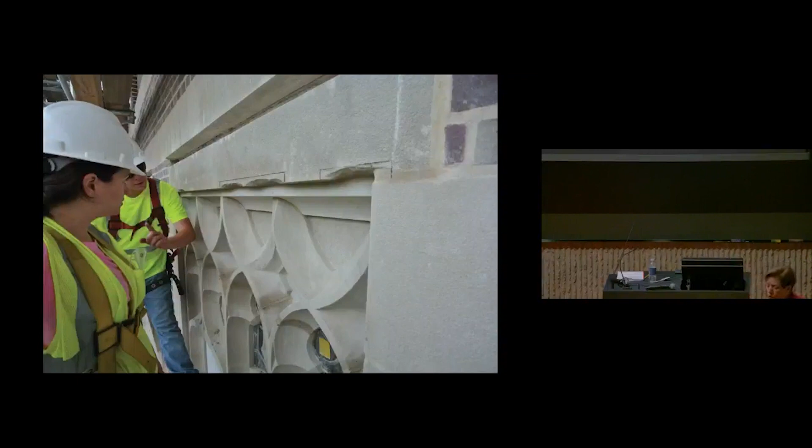The first thing—and I want to talk a little about methodology—was to find out what this deferred maintenance was about. Of course, it's about water, essentially—water, money, and the deterioration of materials. So one aspect of my practice, and now Annum Architects, is to understand the fabric of the building, to get up close and determine how to care for it. The stewardship aspect is central to the work.

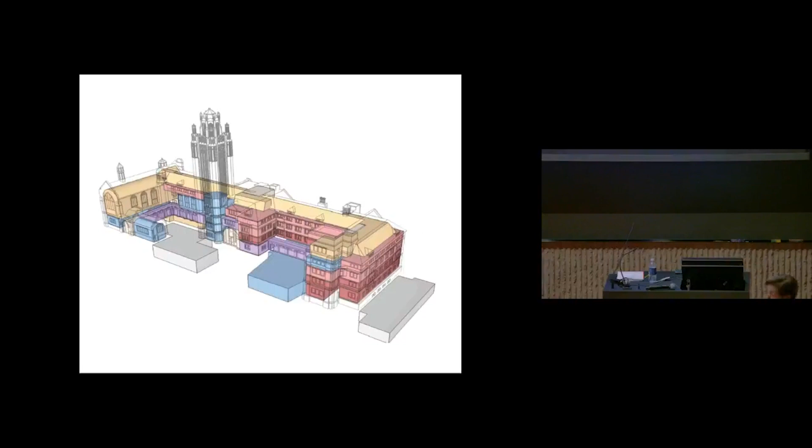The second step is to figure out its place in the city. This building's place was such that a truck dock could drive through it—it was the remainder of a street. The question of unification and identity came together as we started to look at how to program it, how to get offices, collaborative spaces, economics classrooms, and plain people spaces into a building that had never been built for those purposes.

You'll see in the blocks of blue and gray something that's coming up. Coming back to the fabric of the building, it was also about the heritage of what they did versus the heritage or instinct and need that the university had.

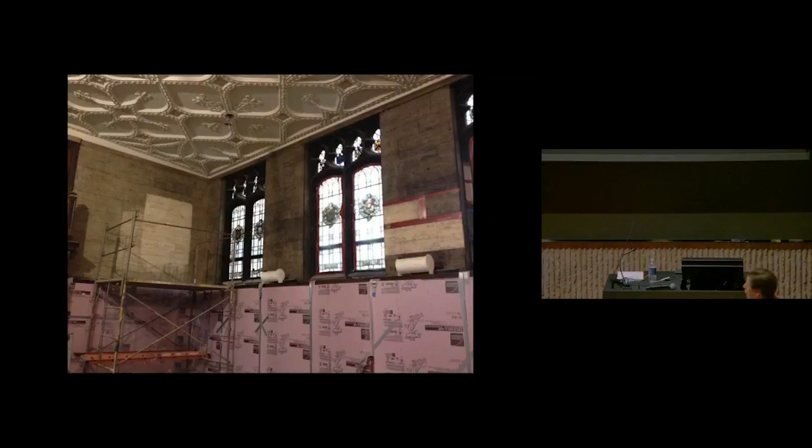We started by cleaning and, if you will, unveiling the quality of this building. We kept bringing students and faculty through it so they could get used to the idea that they were not going to be teaching in a church—they were going to be teaching in a building that had a story, and they were going to make the new story.

So cleaning it and repurposing it for vital daily use was part of the work. Those of you who are engineers will see no ductwork, no sprinklers—you see sleepless nights trying to make all that work. The effective way we worked with systems in the historic spaces was to try to conceal and integrate them as much as possible so we could retain the original fabric.

The space that was the chapel is now the Graduate Student Center, set up for parties and events. The integration of new lighting and old lighting doesn't seem to fight with each other—I think they're having a conversation. That's true also in some of the more Harry Potter-esque areas, which were dim and difficult to navigate, where lighting and restoration gave the space an opportunity to welcome people and move them through the building.

There are a lot of, yeah. I can't interrupt you. As lovely as it is to have you so close, YouTube isn't picking up your sound. So if you could go back to the mic, that would be great. Too bad, because you didn't come to New Haven. You saved on gas, you saved on carbon footprint, but you missed us. As my family will tell you, I'm available for lecturing anytime.

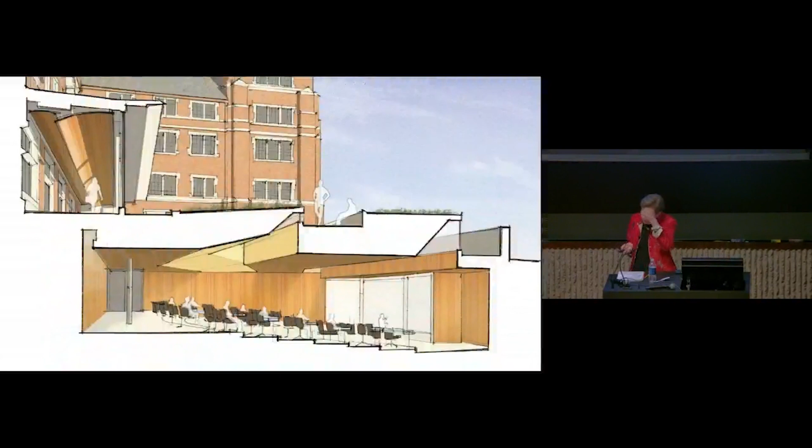And then finally, the other intervention is the need for a large lecture hall, which the structure gave no sense of. You could not make such a space and keep this building intact. So we excavated, and we dug down for both mechanical systems, and we used the tightness of the below-grade envelope to develop a greater sustainability about the systems. And we were able to create a well-lit, large lecture room that is used by the department and really by the whole university.

So in the back, there was also an opportunity. I'm always big on: you go where the dumpsters are, go where there's a problem, and then come up with something that really makes it a place for people. So this was the back alley before it was closed, and that's that space now. The street is a shared street. The opening is closed, the buildings are united.

And then this pavilion building, which is 4 stories, is for economics research and collaborative work. You can see that it's full of open spaces with views out, and it has a scale that was intentionally trying to participate in the heritage of the small row houses along that side street, so that it sat comfortably behind them as part of a new and old conversation.

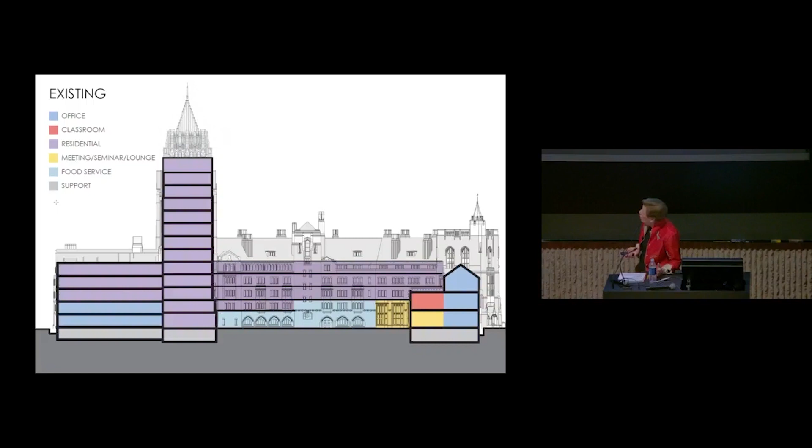So as a space for people and for collaboration, this was the way it was organized. The architects know this purple basically represents one kind of use, and the idea was to change and integrate new uses. So whatever the colors mean, you can see that the hands are intersecting now, and that they're collaborative spaces mixing with offices and mixing with meeting spaces.

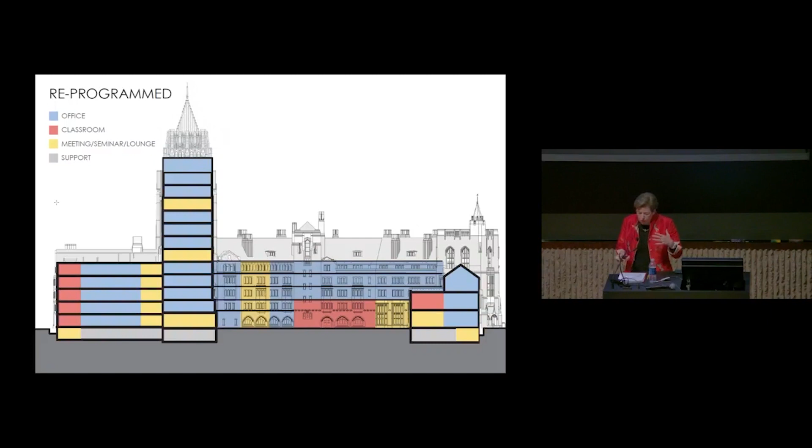I'm doing this because I think Gordon Smith is, as an engineer, focused also on how things get done. These are images of some of the research and repair work. Here are some of the folks doing that work, and the day-to-day activities there, including the restoration, working with craftsmen.

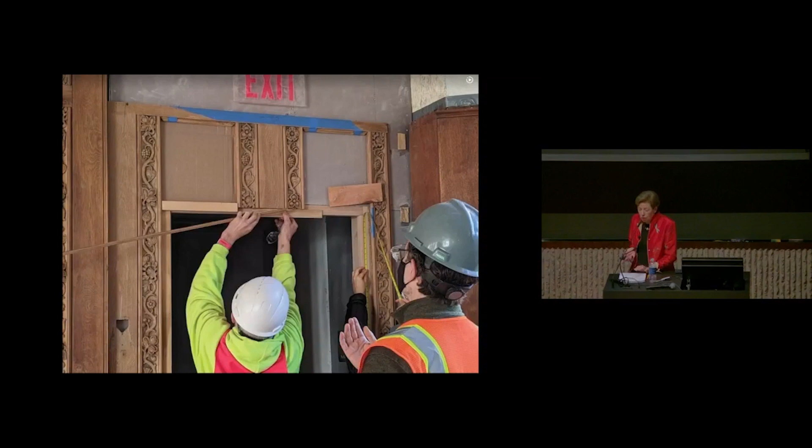Trying to find a lot of craftsmen in the Connecticut area was part of this process. There were literally hundreds of leaded glass windows that had to be restored. There's no one crafts company that can do that.

We had to have 3 different leaded glass groups all throughout the Northeast take on a portion of the job. So now you're seeing the results, which is a kind of rekindling of the spirit of the space and the materials. Much of it changed because it is now completely accessible for ADA purposes. So these levels are raised even though the stone is put back as it was.

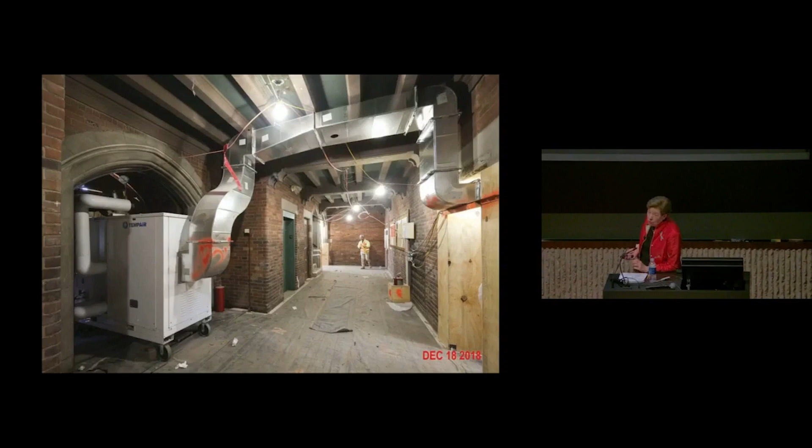And in it also is a new stair, a new vertical connector that unifies the building. And if we were all having a lecture there, we could do that via that stair without disturbing any of the offices. So we did need the stair to go someplace reasonable. This is where it was going.

And now that space is a student concourse. It's below grade, but it includes open spaces, lots of borrowed light, and a kind of light touch for doing whatever you need to do.

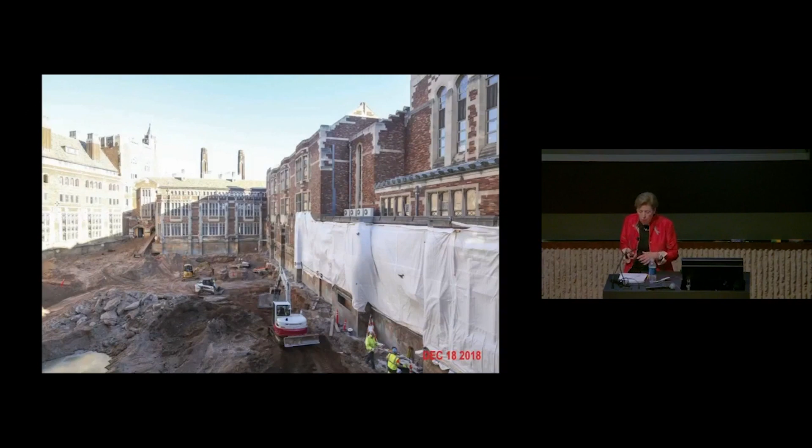And then finally here also, the goal was a lecture hall and the goal was a film center. So there was no way to add footprint to the site. The idea, again, was to find, outside of changing the structure of the building, those opportunities for the broad span functions, and so that's what we did.

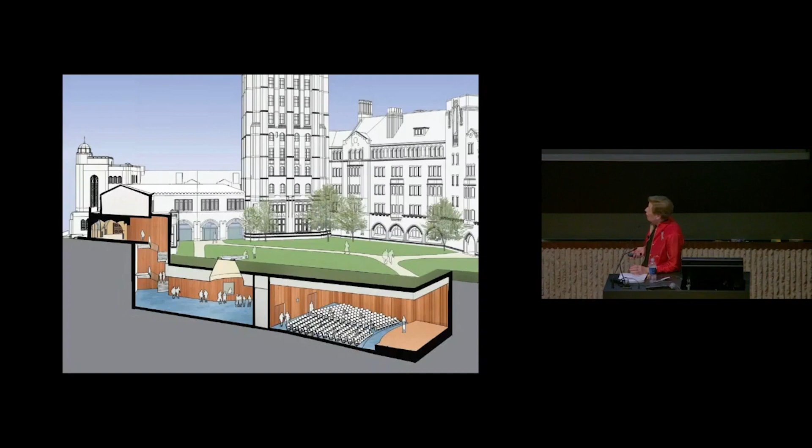And we brought Chicago to Yale, but Yale taught us so much that was different, and it was so complex. And now these spaces are quite different, fresh. I'm thrilled to see people using them back after COVID.

And they have skylights that go out into the garden above, but this is all under essentially a green roof. And that's the lecture hall.

So historic spaces are certainly well cared for in this building, but that contrast with the more contemporary spaces is intentional, and hopefully it's a marriage that's a happy one, where there's a legibility.

I think that buildings teach, and occupying a building like this should be both an opportunity to reference Yale's history and legacy, but also to think about the way we teach now, the way we learn, and the kinds of integration of contemporary design that are possible within historic spaces.

And that's the green roof, the courtyard. So I'm glad, Deborah, thank you for mentioning it, and I hope people will go there. So that's 2 that are similar, and they're both landmarks, and the intention is the integration of new things and the redemption or redevelopment or reassertion of things from legacy period.

It takes a huge team, and I can't go forward in talking about 2 more projects without saying that although I give the lecture, it's a great team of people, including Yale Facilities, who make it happen, and they deserve tremendous credit.

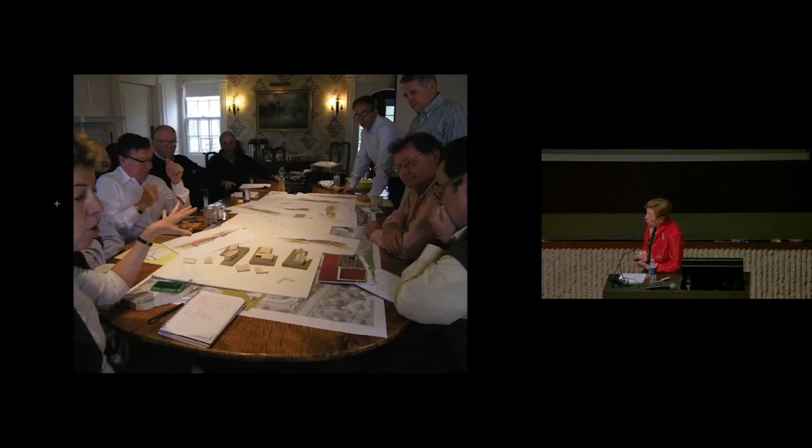Let's go see the real McCoy from the 19th century. Let's see the collections in situ, the way the donor planned them. And what I'm going to talk about for both these projects is the client group.

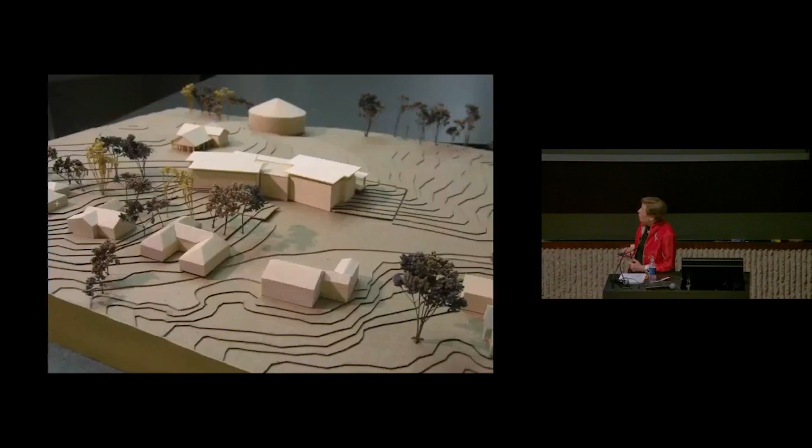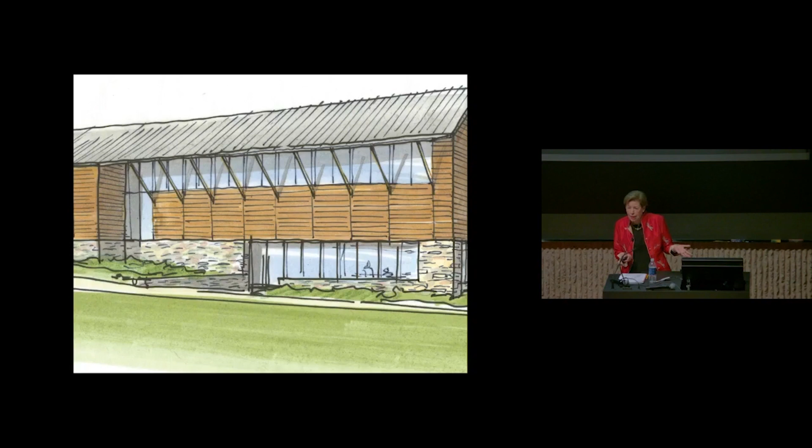So in this case, this is a typical workshop, and as you can see, this client was actively engaged in determining what would happen. There were hands-on sessions again and again, with lots of models and options, and they needed to time travel to understand what they felt and could build consensus about: a piece of 21st century architecture. If you've skipped the 20th, what's the 21st? And when you say you want a contemporary building in an historic setting, what do 12 people really mean when they say that? And what does the community of Shelburne mean when they say that?

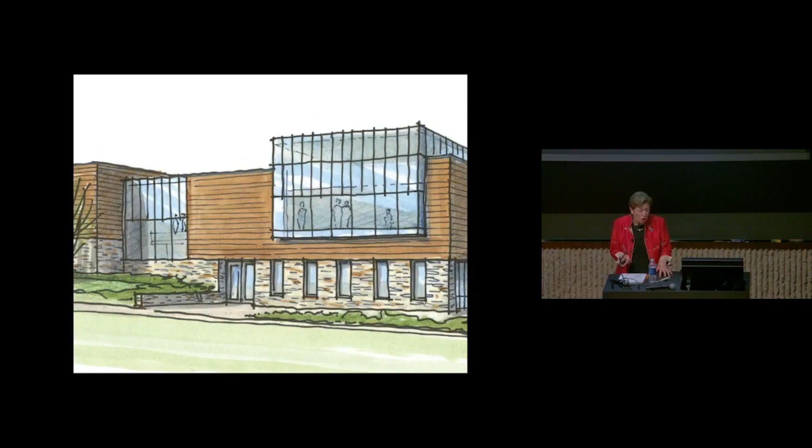So we started to develop what I call the series of options. I spared you 4,000 of them and brought about 5. But we just kept pushing the question of, what about more glass? What about siding? How tall can we be? What about the connector being glass? What about the use of stone? That's common to your area, and we can use Champlain stone. What about cedar? Yes, there's maintenance, but it's from around here. What about a large oculus? Can we look out? How do we feel about a flat roof? When can we start to think about a porch?

And the narrative of how you make a building, for me, is one of interface and interpersonal connections on a professional basis where each side is pushing each other forward. And the outcome has to be something the architect believes in, but the client has to feel passionately enthusiastic about.

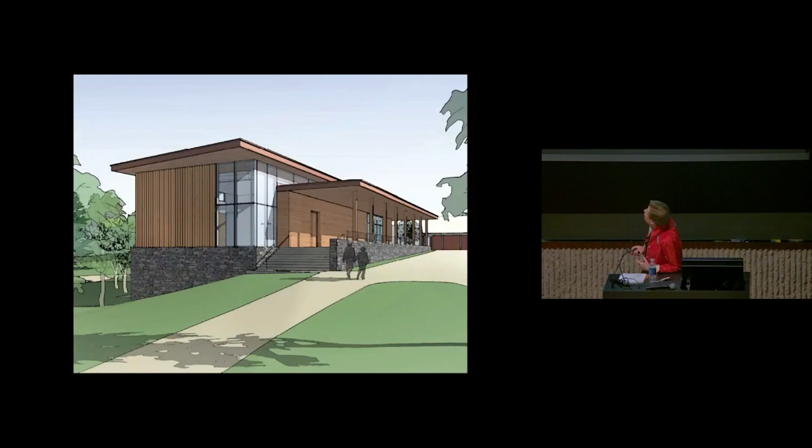So we did finally get there, and I'm just showing you how we got there, and that is largely through the use of common area materials: beech flooring, cedar siding, stone referring to the stone already on the site, setting up mock-ups, letting everybody see it. There were a lot of snowy trips.

And this is the building now, and it sits as the gateway building to the entire campus. It is, as I said, made of very simple materials, a very resilient curtain wall because of the climate extremes in that part of Vermont, rubble stone from local sources, and then wood siding and very simple detailing. And it has tall spaces inside, with Vermont slate flooring.

And a large meeting room that's used for everything from craft fairs to weddings, with views out onto the site. And then again, this idea that transportation between the two floors should feel like a flow that's engaged with views as well as engaged with simple materials. And always the view — that's the Ticonderoga, a riverboat to die for that crossed Lake Champlain.

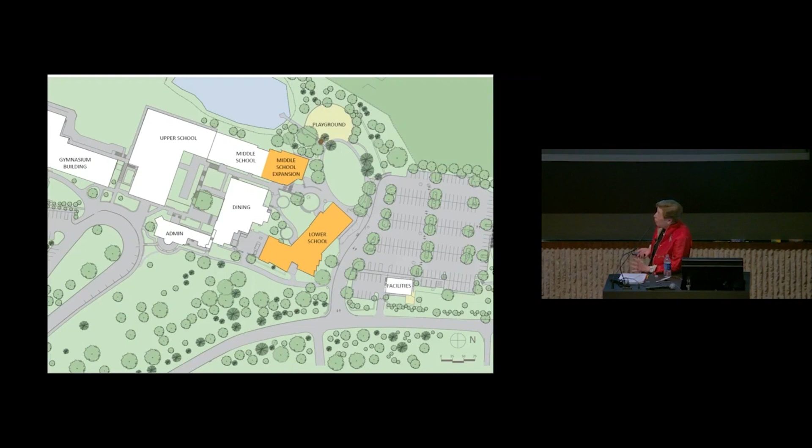So for me, modern is a very broad word. It doesn't really have a perfect interpretation, but we moved into site planning. Sasaki had done a very good master plan, and we developed a plan for a lower school and for an extension on the middle school. This is a campus located in a residential area. It has outbuildings, and its historic centerpiece is a stone, sort of Queen Anne style building constructed around 1901.

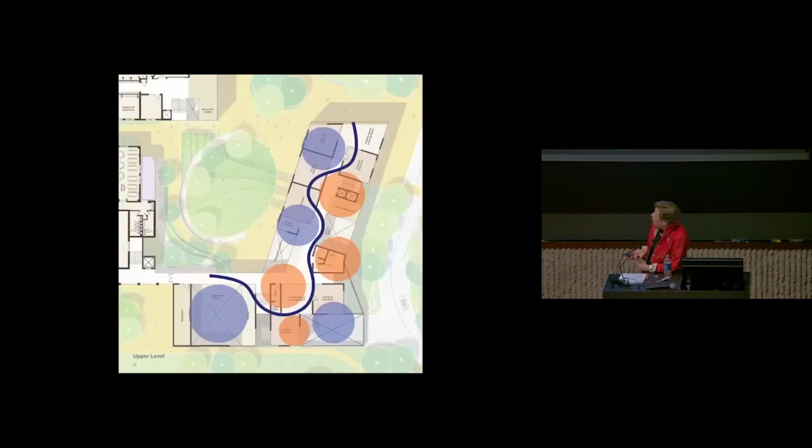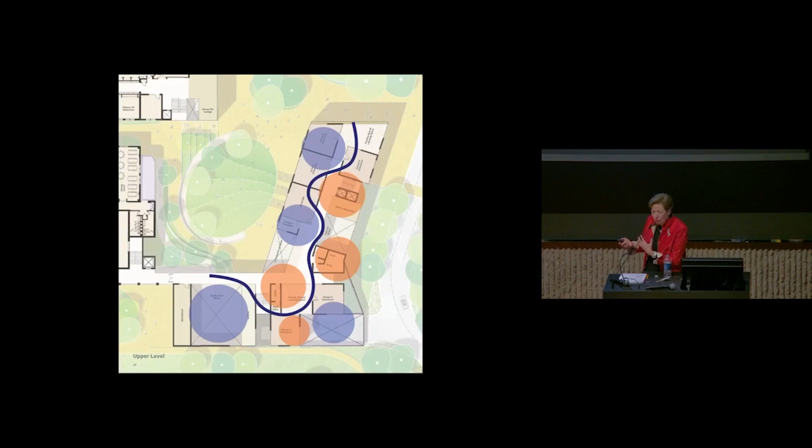We started the process by talking to the students about what they wanted from a school, what they didn't have, what they needed, and what it would be like to build a building that could fit in with the campus. We heard amazing creative things from them, and we also worked with their faculty, imagining that as well. We came up with the idea of this looser arrangement for the lower school. Often there'd be a straight corridor and classrooms on each side, and you have to go where you're told to go. This is a more flowing idea about collaboration and loose spaces.

What we didn't know is that in Greenwich there is a design review committee that wasn't so invested in the idea of a modern building anywhere. Ours are conservative — this isn't like Daniel Libeskind coming to Greenwich. So we started working with this volunteer group, and all respect to their volunteerism, a really interesting process. And they said, our school buildings are brick.

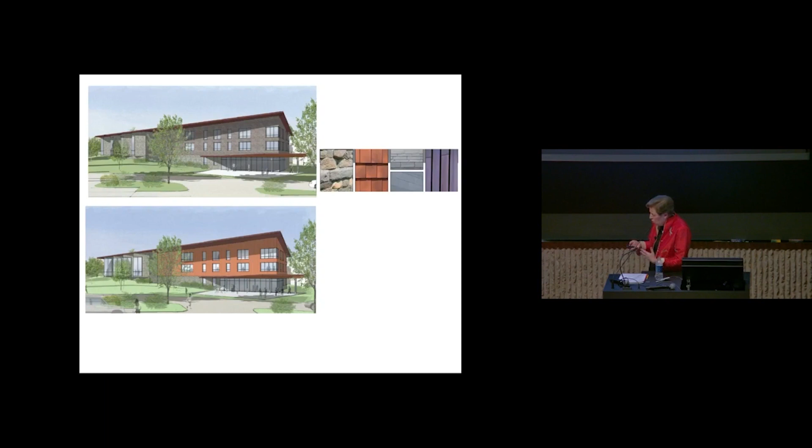So we asked for some freedom, and we started to look at whether this building, which we wanted to sit in the land, could be stone or wood. How would that be? What would be the different materials? What did the students think?

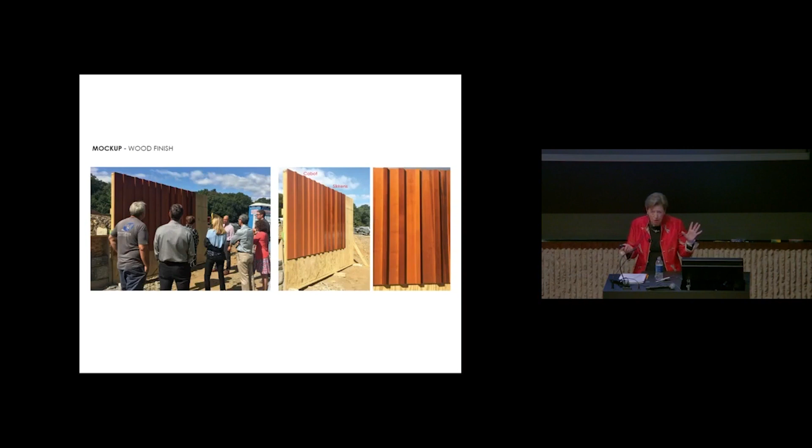We set up mock-ups. Of course, all you have to do is say the word mock-up and it's like you're at the Red Sox — it's a blood sport, and everybody comes. It's really great, and the school ran a fantastic process. So we finally settled on our materials.

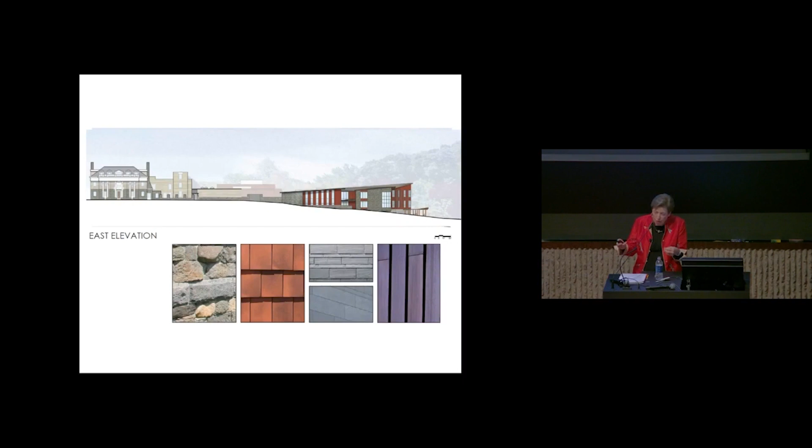We started to look at how this building on the right would really excuse itself from a direct relationship with the original building on the left, but allow their kind of serviceable buildings to continue to exist between them and establish its own identity.

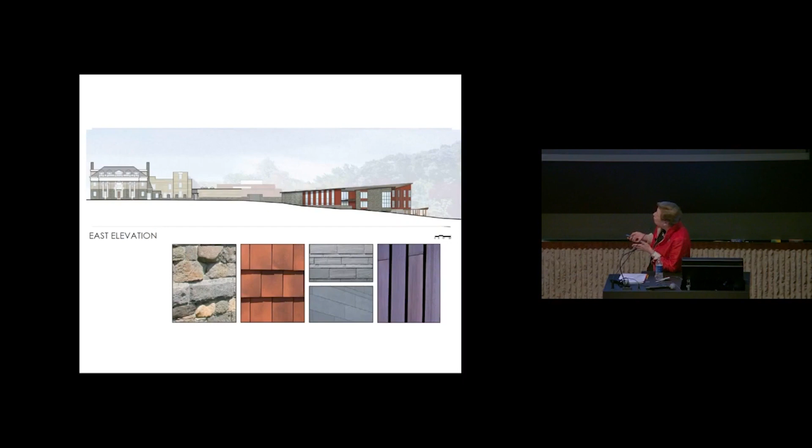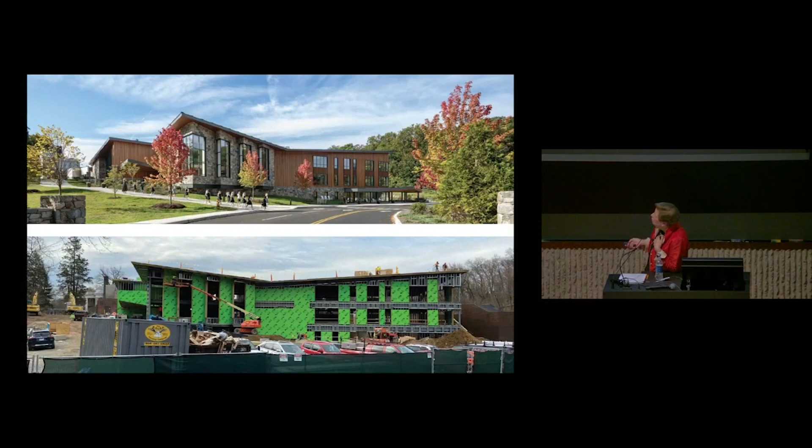These are just some renderings of the building before it was constructed, showing the way materials would be applied. You can see down below the views during construction, then up above the completion. I show this because there's such a long period of time where all you're seeing is this pea green, or lime green, on your building.

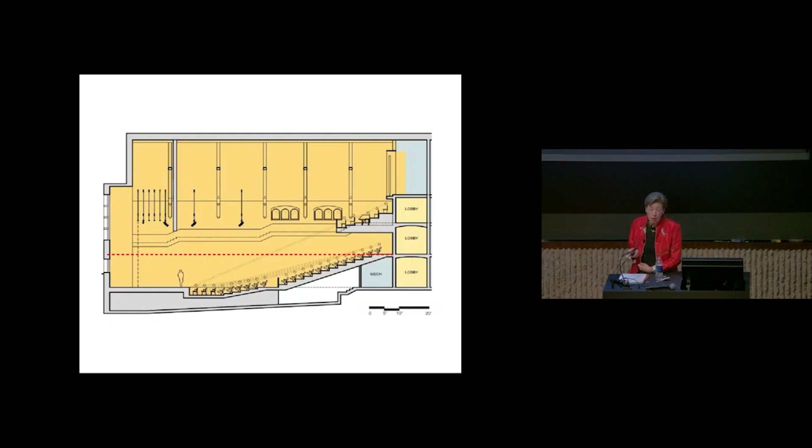So I'm jumping to the conclusion because I want you to see that we are indeed scraping this building out. We've done a historic preservation study, certainly retaining all of the structure, the stone, the incredible truss systems, the leaded glass. But the floor, indicated by the red dashed lines, between the current chapel and the swimming pool is already gone.

That's so that we don't need to add an addition above for a fly for theater. Instead, by depressing the stage and raking the floor sharply, we can develop a fly area over our stage that fits within the gabled roof.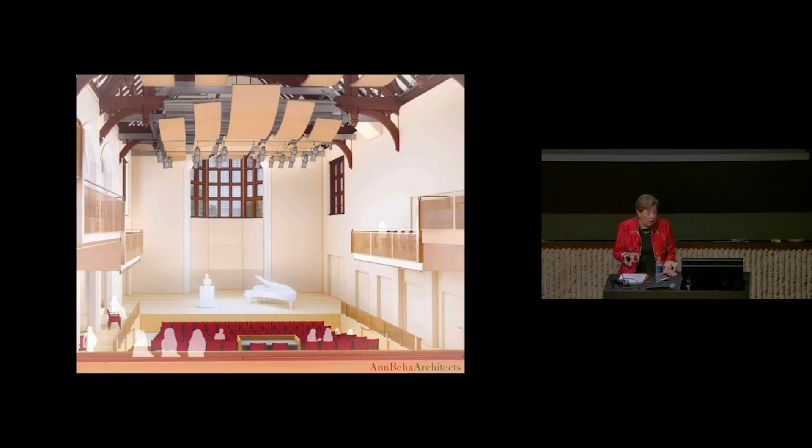So this is a rendering of the room as it was at design development, with a beautiful window that's been disused for years, restored and in place, side balconies, the stage itself, set up in this case for music, but it's also available for dance. And we also have a stage extension, in fact 2 stage extensions, that will help bring the performers out into the audience. It'll also be used every day for lectures and all school meetings.

And the view back up, you can see everyone is tiered. There is a kind of pew arrangement like these seats. And then we have the stepped balconies to the left and the right, wrapped in a kind of bronze mesh. So all of the reflectors and details of the

theater technology are fitted between the rafters. They will be visible, but there is definitely this moment where new and needed technologies will be interfacing with the historic fabric.

But the needs of the school were not fully satisfied just by renovating that building, and that's now in construction. The idea was that for real arts education, they could extend that building and have a performance and rehearsal space. So dance studios, a black box theater for smaller theatrical performances and music, and a music practice room, some larger scale spaces that they didn't have.

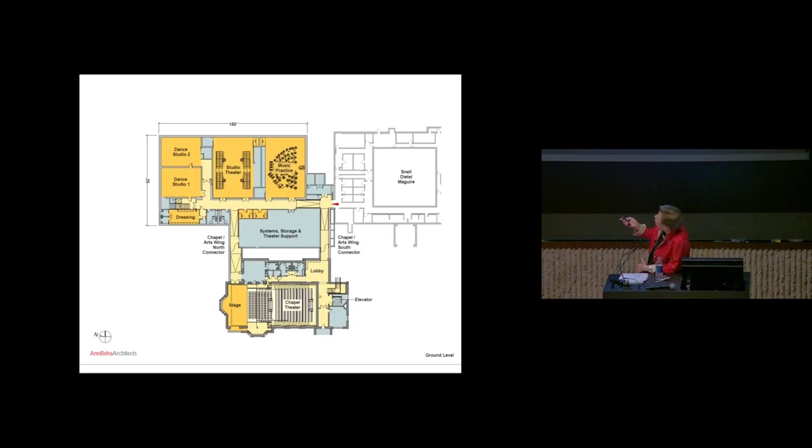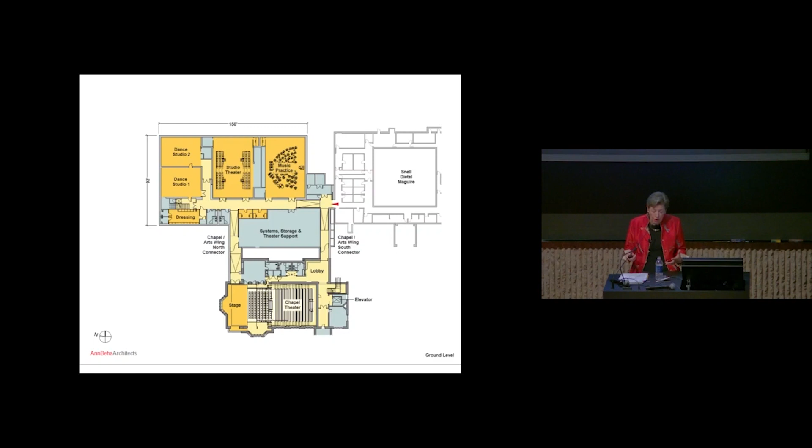So it's kind of a circular connection, and the idea is to be able to move freely between real performance, rehearsal, preparation, scenery, all of the kind of functions of theater, and to create one home for this that's also connected to the library and other academic facilities.

And this is where we are right now. Actually, that's a hole right now. And it is a slightly peaked roof. It's an inhabited space. It's designed so that everyone can sit on there during softball games and other games. There's a big tennis area right out there.

And this fin is the brow that comes over the glass that goes down into those 4 rooms. And then the connector is just up here, bringing you back into the chapel. And here it's below grade, taking you to the stage.

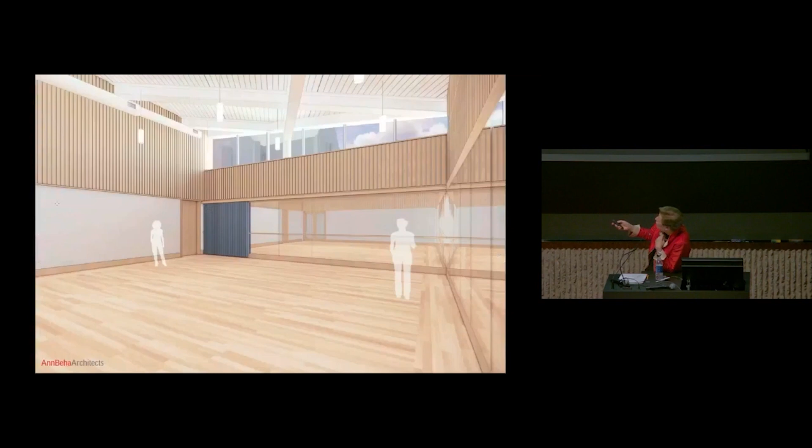This will take about a year and a half or so to complete, maybe a little bit more. This is just a view of the simple dance studios.

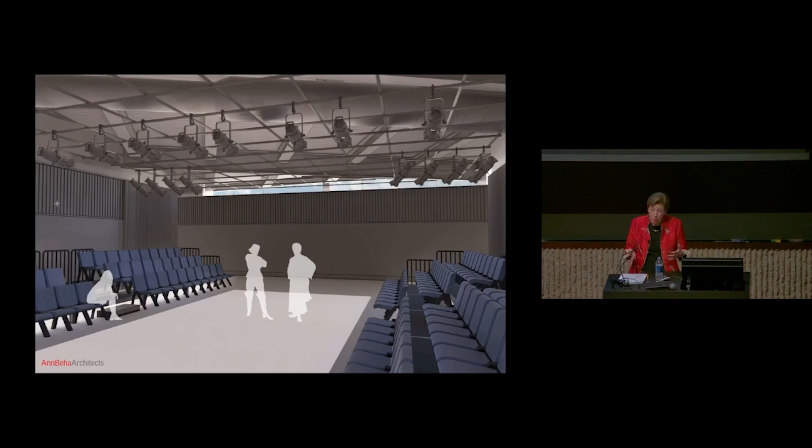I think one of the things we're known for is a kind of spareness of materials. It's important that the people who run the theaters and run the dance be able to manage and adapt those spaces to their needs. So in working with them, what we're giving them is essentially an acoustic shell and a proper set of finishes and floors, welcoming them to adapt it over time to what they need most.

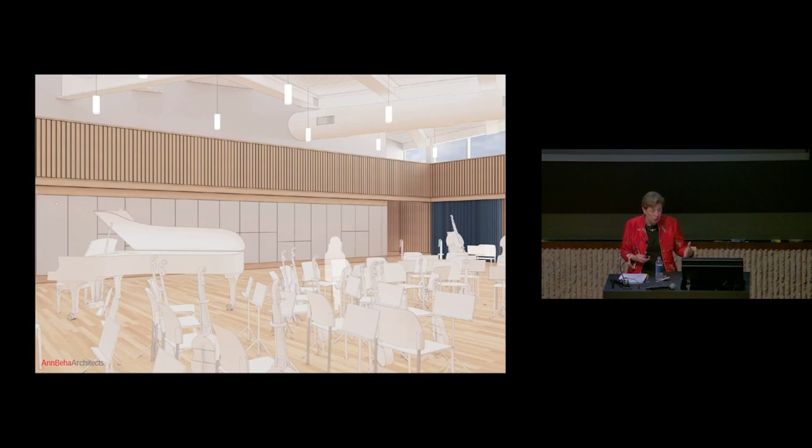So every room is carefully organized for its acoustics, but the real sense here is that you can have people moving between these spaces to do lots of different things. And that's the last slide of that.

So those are the three pairs. I see connections between them. I don't know if everyone else does, but I think part of the connections are the processes of engagement with the client groups and their constituents, and the level of association one has with the faculty and the users of the building, as well as the idea that one doesn't always need to build above in order to be effective. Sometimes what's important is to build within the landscape rather than on the landscape.

So just before we end, let me say something about new chapters. My new chapter is now as a senior collaborating architect with Annum Architects, the successor firm to Ann Beha Architects. The new name indicates a new generation of leadership, and they are amazing—it is a pleasure to watch them soar.

In this chapter, I have the independence for initiatives like the one I'm in right now, teaching at Yale, something I could never do when I was running a practice. And I have an opportunity for more advocacy in my community, more engagement with the profession, and exploring a widened view of practice and its potential to impact.

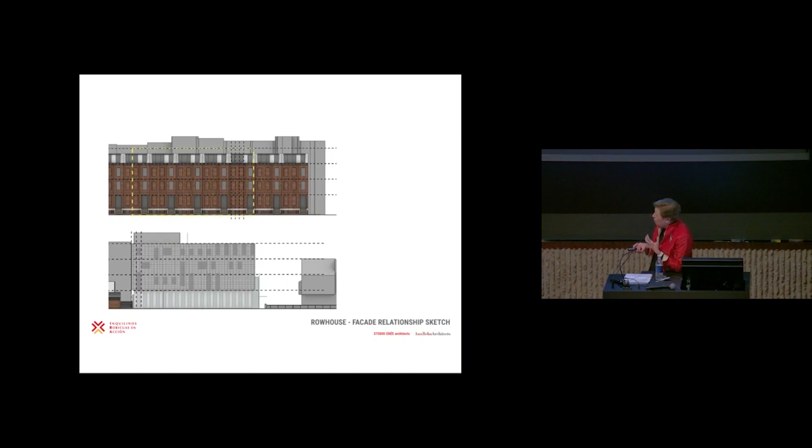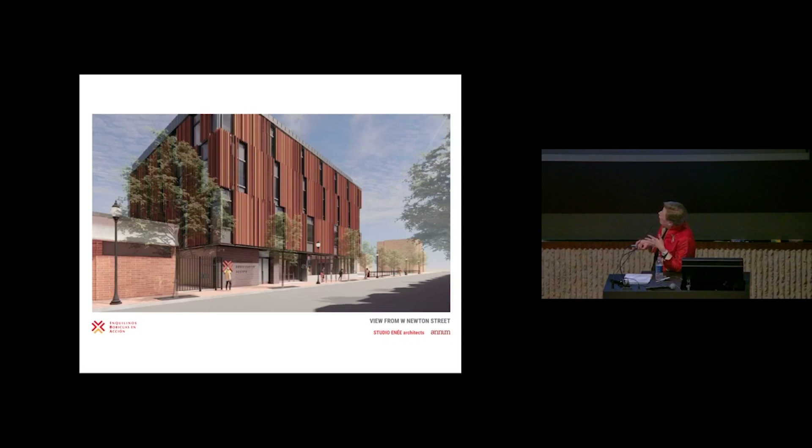And here is the site now, and we are just getting through our permitting. This will be the building—a terracotta rain screen, simple building of curtain wall construction. It's 4 stories and has all kinds of community facilities in it. I would have to say it was not what the Historic Commission in the South End expected.

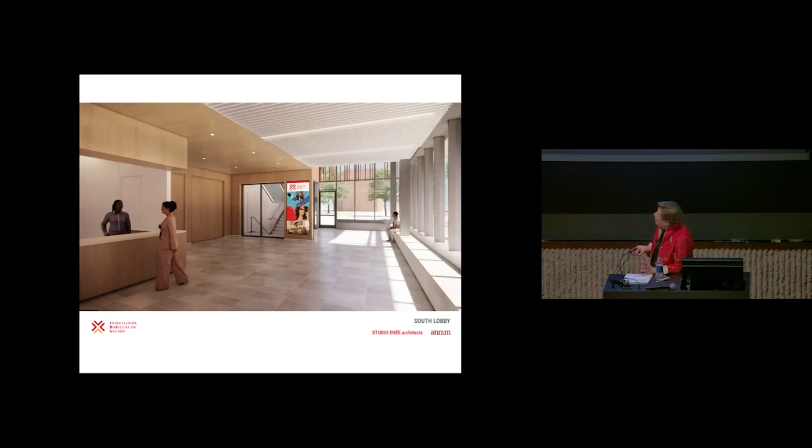But they have been amazing, and the collaboration with them has brought along the approvals so that we are getting close now to being able to get our final approvals in the city and get going on this, fill this hole, and start delivering these services. Our office is also handling the performance spaces in the building, looking not only at the simplicity of it, but also how it engages with the nearby playground.

You can see here that there's an enormous big door in the middle of it, which we would love to have open onto the playground so that there's interior activities and then it bleeds out into the neighborhood. The community has been incredibly supportive of this. The Landmarks Commission has really come a long way with us, and we've come a long way with them, working with them, and we've learned so much from each other.

So that's what's going on. I hope to get a start. We'll get in the ground on this, probably I'm hoping in the fall.

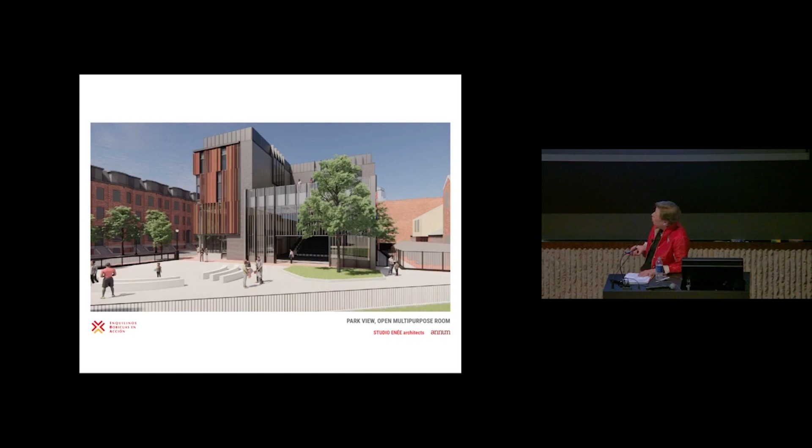And maybe in the years to come, I have a little more time to exercise that citizen part of my life. So what does that mean? Well, so far, it means practice, because I am.

It means education. It means advocacy and going to a lot of community meetings that before you just said, well, I'll just listen to the Zoom. It means engagement with a lot of people who have development going up near them and are not enfranchised to speak out about what they need.

And our studio knows that because we've had, even on the Symphony Hall project, advocates for public housing speaking to us directly. And those people need to be heard.

And it means communications. So communications are the fabric of this lecture. They are also the fabric of how one explains to a community what an architect can do and should be doing. And communications with the city and with regulatory groups is all an effort to try to help us grow together towards understanding that we can have our legacy, we can have our stories, but we need to broaden our sense of what legacy is.